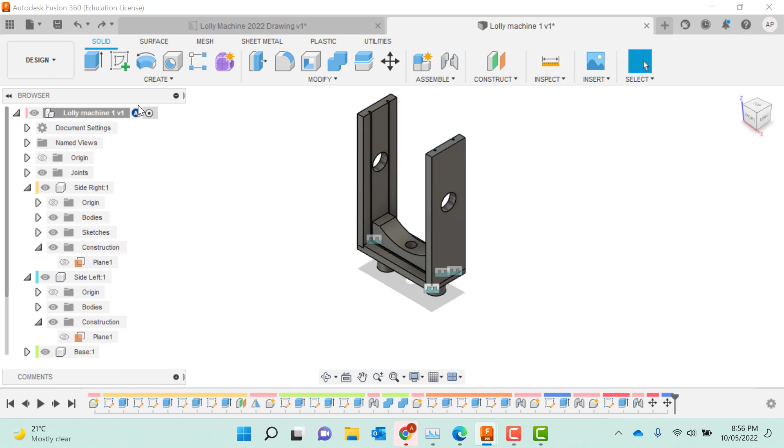And now what we're going to look at drawing is the little stands, and we'll draw the base. So we'll come back to our drawing here. Every time we draw a new part, a new component, we'll call this the stand. Say OK, we'll start sketching.

Now you can draw a top view or front view. We'll draw the first one front view and the second one top view. So looking at it front on, just looking at that little drawing there, actually, I was editing some of these and I seem to have made an error.

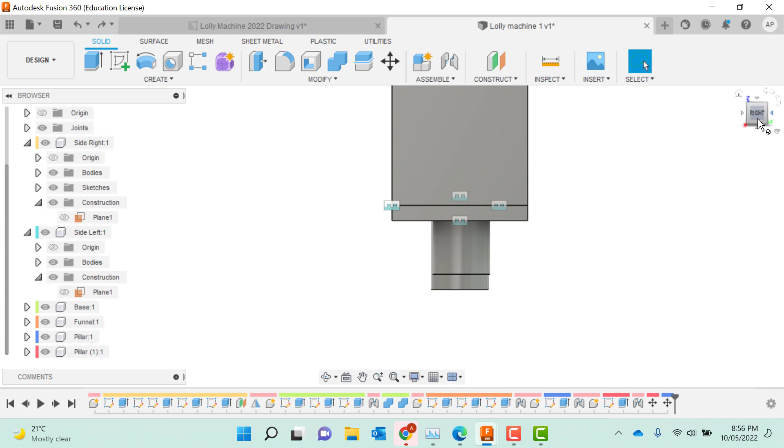So we'll need to play with that when we put the base on. Alright, so we're looking at drawing, create new component, and we said we're going to call this the stand. If you draw this front on, we want them to be 45mm thick tall, even though there's two different numbers there, two different sizes.

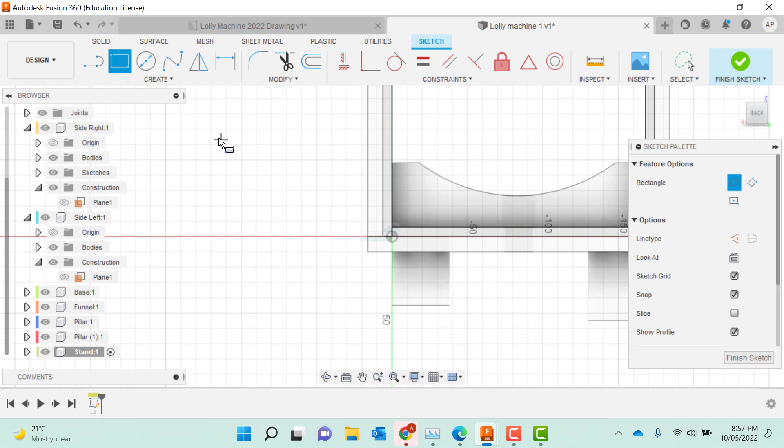Two different sizes. So we'll draw ourselves a little rectangle, dimension tool.

We'll make this out of 19mm thick material, and they're going to stand 45mm tall. We'll finish that sketch, look at it in isometric, and we're going to extrude this across 90mm, which is the width of our piece of timber.

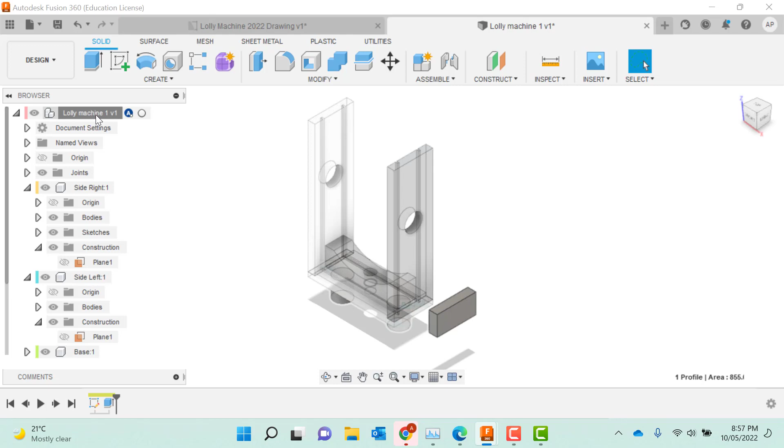We can then look at seeing the entire drawing, so we'll turn on the whole drawing, look at the bottom of this, and what I would like to do, I'll just place this now.

Look at this. I think we need to add, well actually if I minus that back, at the moment I've drawn that.

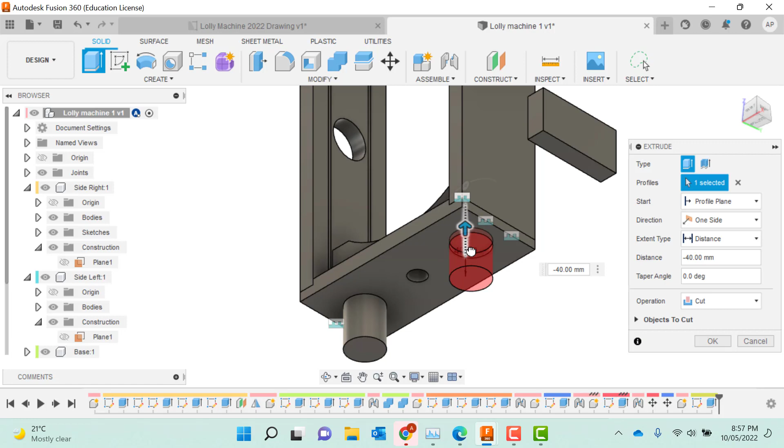Give me a height. Right, I'll play with that. So I want to select the entire drawing.

Use the joint tool, and I will put this right there. So it's now at the base.

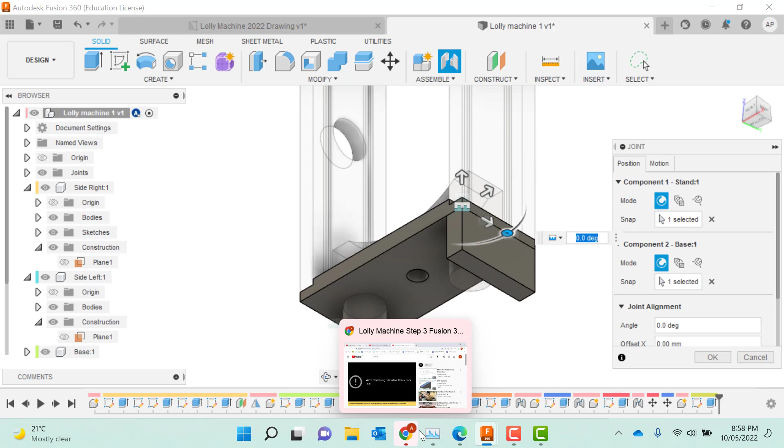But what I will want to do is move it across. If I did drag this all the way, 90mm puts me very close to the center. I'll actually move it 80mm across. I rotate that around, it's not quite. Let's make it 70mm, and 70mm makes me a little bit short of the hole.

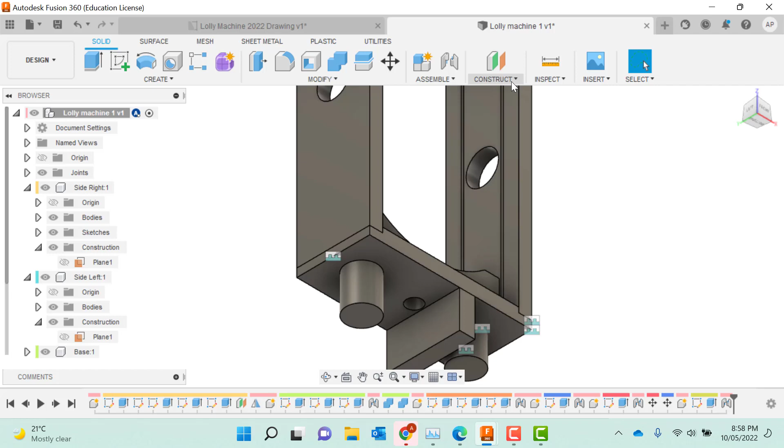Excellent. We can now look at drawing another one and moving it in, or we can go back to doing something like the offset plane. I'll grab that side, I'll set my offset plane to 11. No, let's make it 8, which will get me pretty close to the middle.

Say OK, create a mirror. Select that component, which is that side, and then select the mirrored plane, which is that one. Excuse me, it is.

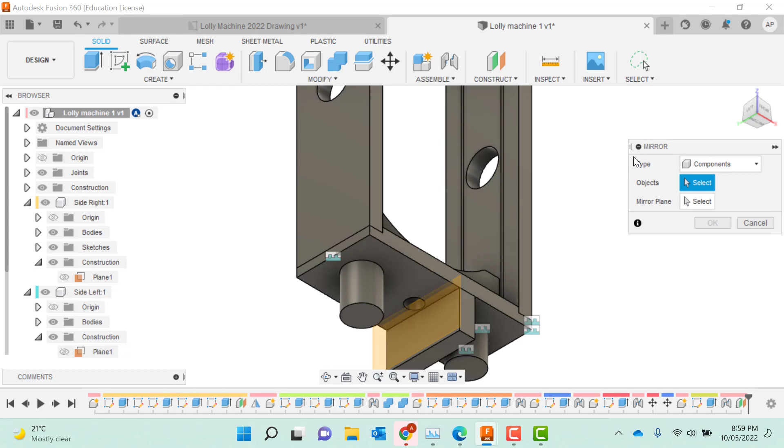So, create the mirror. That's my component. And the mirror that I want is that one. There we go, we say OK.

If I look underneath, well, I might just move it across a little bit more. Maybe not 10mm, and we'll go 5. That looks pretty good. Well, I've now drawn my two sides.

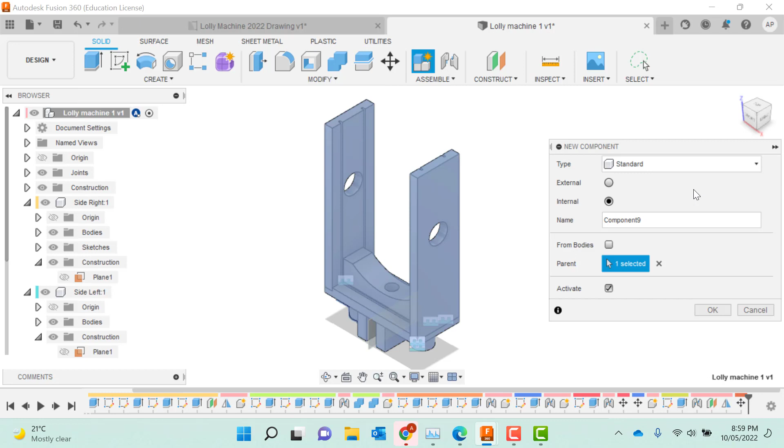The last thing that I want to create for the base there is the ramp. So we'll go to this, we'll call this the ramp. I need a piece of timber the same size. So with this one, I might draw it,

on that front view. So with this, I can draw dimension tool, wrong number, Control Z. It's a good friend of yours in Fusion. Double click on that, 45, not 455.

And then again, dimension tool. This is 90. Finish sketch.

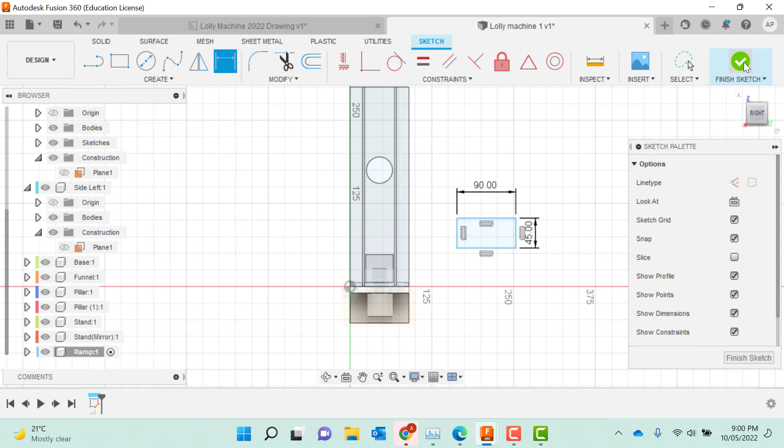Extrude this to 19mm thick. We're now going to sketch on the face of that and draw ourselves a line. So get it so that line changes. And we can go up into that corner.

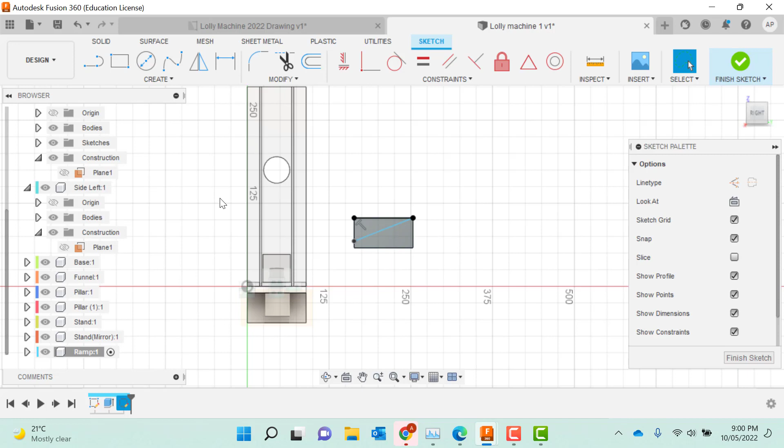And I can press enter. That line I can delete. We'll finish that sketch, use the extrude function, and say minus 19.

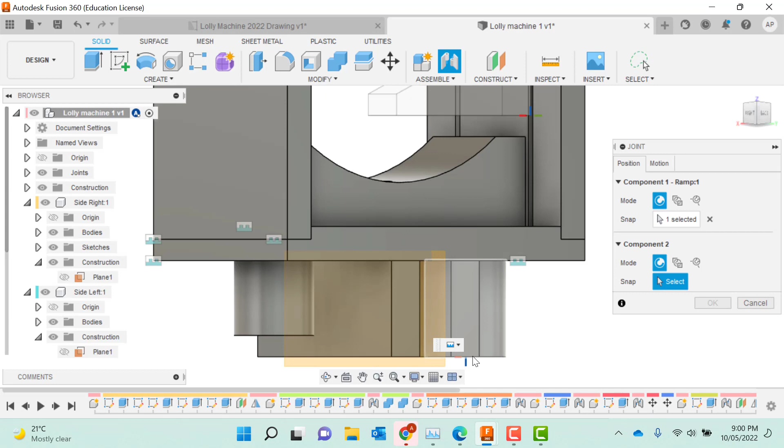So that's the ramp that we want to use. I might look at the back of my drawing, turn everything on via that central button, use the joint tool, and I would like that corner zoom in to live just there.

And that's going to line us up. Might not line up perfectly so, but that's okay. If it annoys you, go to your front view, zoom on in, grab your move tool, and we can minus that.

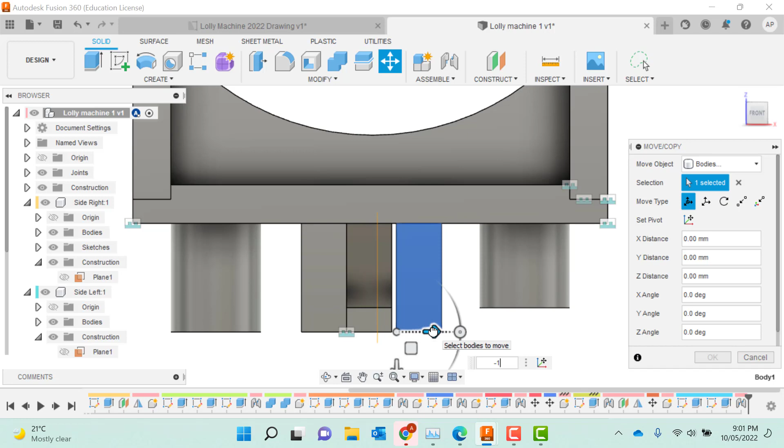Go -1. Looks like it's -2 for me. There we go. Alright, now I can also see that this one has to come down 10 mil. So if I go to the bottom, extrude that,

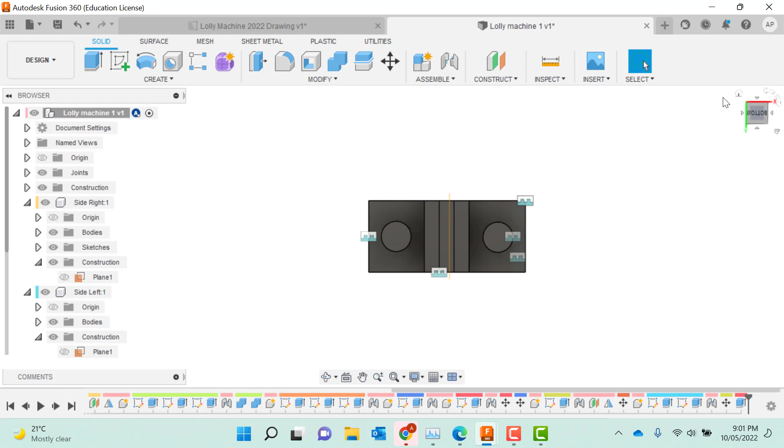and what did that do? Looks a bit better. Alright, the last thing I want to draw is going to be, we've called something the base already, so we might call this the bottom plate.

New component, it could just be actually the base plate then. A base plate, okay, sketch on the bottom.

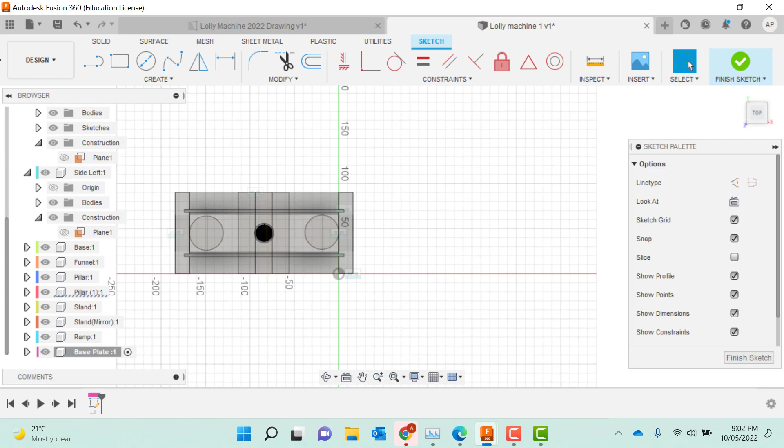This is going to come from a piece of timber that is 250 by 140, and it's going to be 19 millimeters thick.

The front of this is in this corner here. So I'm now going to sketch on edge, and I want to draw myself an angle there.

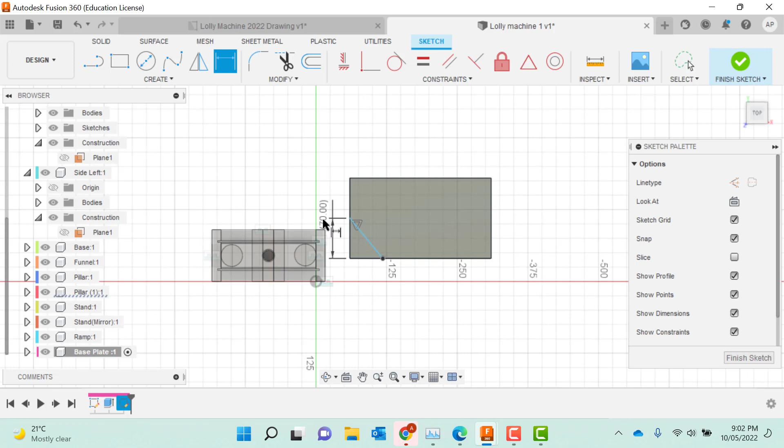Dimension tool, I want that to be 60. Oh, what did I just say? I didn't actually read that. It should let me dimension this.

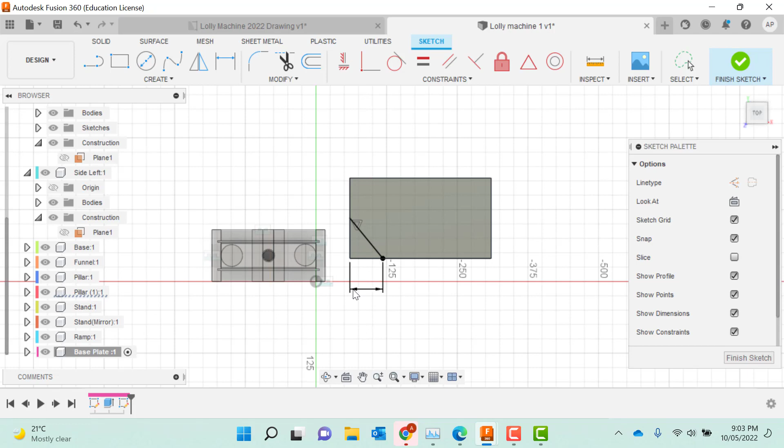Control Z, dimension from there to there, 60, from there to there. What's it to say, 70? That's fine, we can live with that.

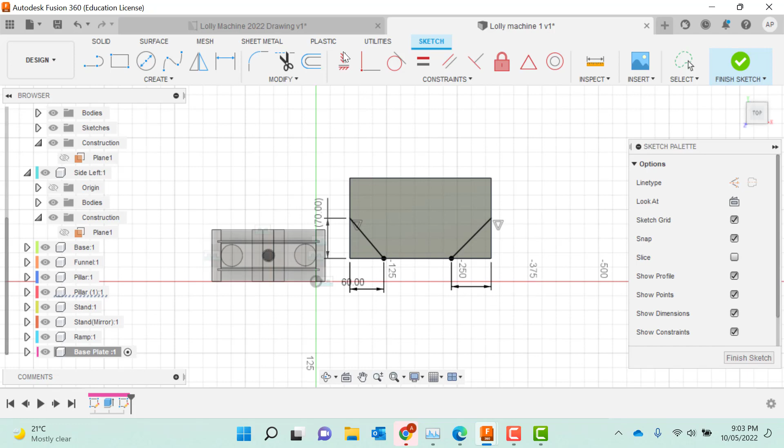If I then drag this across, and then we'll look at coming out somewhere near the same. See if it lets me make this one then 60. Beautiful. Finish the sketch. Extrude tool.

Grab that. -19. Oh, Control Z. Select the two of them. If you ever do that, Shift, extrude -19. We'll get rid of both.

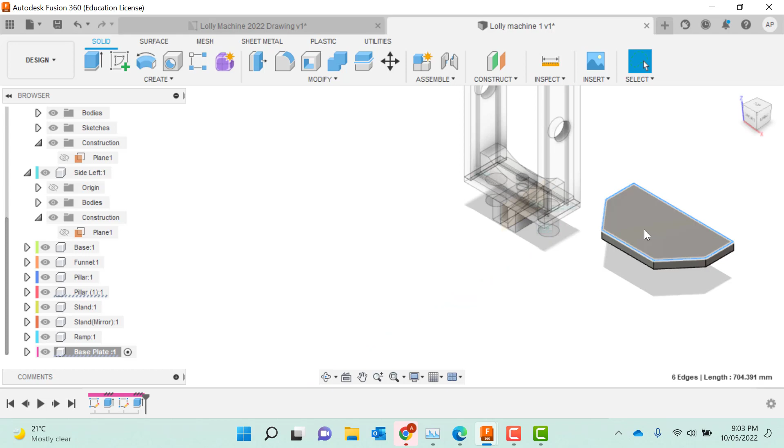Another little thing to show you. What we can do now is select each of these edges, and we can apply a chamfer. 1, 2, 3, 4, 5, 6, and we go to modify chamfer, and we want it to be a 5 mil chamfer.

Enter. There we go. So now we just grab the jointing tool. We are covering up a bit of the sections there. What we can look at doing,

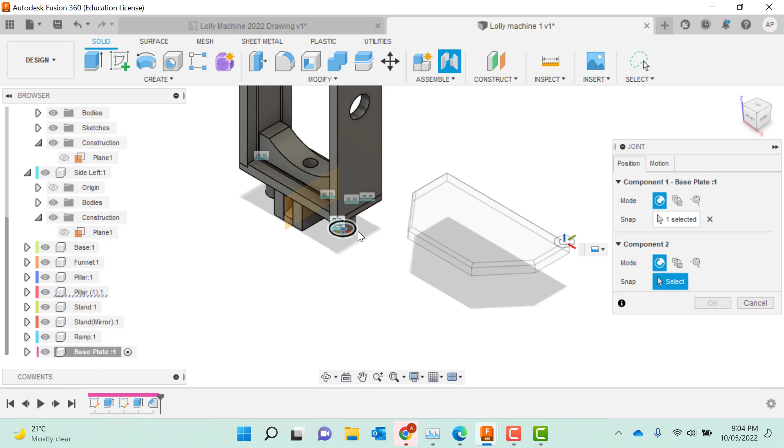if I threw that straight onto there, I can then drag that across, drag that back, look at that right view, see if I'm happy with where that's lining up. Probably drag that back a little bit, but no, I reckon that works.

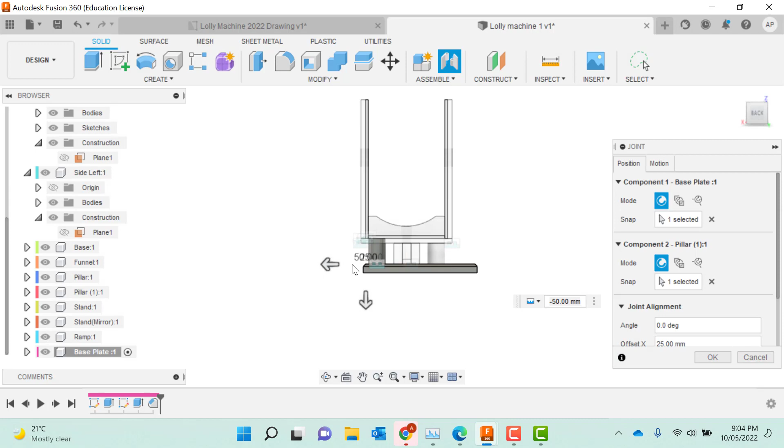Look behind it. I can see that I'm too far one way. I'll grab that and drag that across. Press enter. Look out in the isometric view, and there we have the base and that bottom section of our lolly machine.